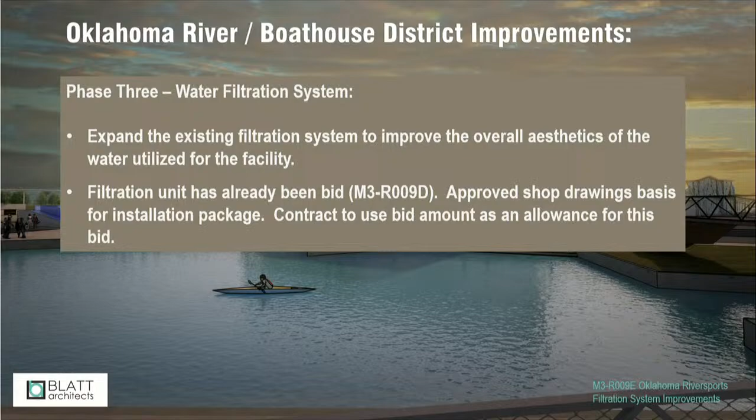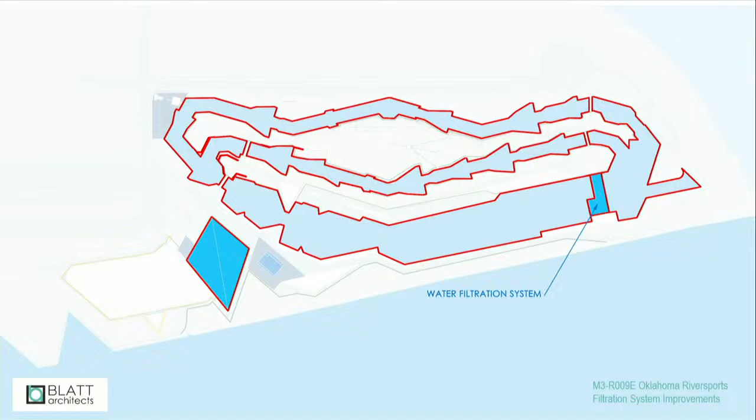So the map in front of you is the site plan of the rapids, and over to the right in dark blue is the location of the current pump house. In that pump house is where this enhanced filtration system is going to be installed. The primary filters are already there, and the WaterTech approved polishing filters are going to be what gets installed. That's the part that has already gone through the procurement process. It's been identified and is sitting to be incorporated into the general contractor's scope of work. After that, it will go through an ozonation process and then out into the rapids channel.

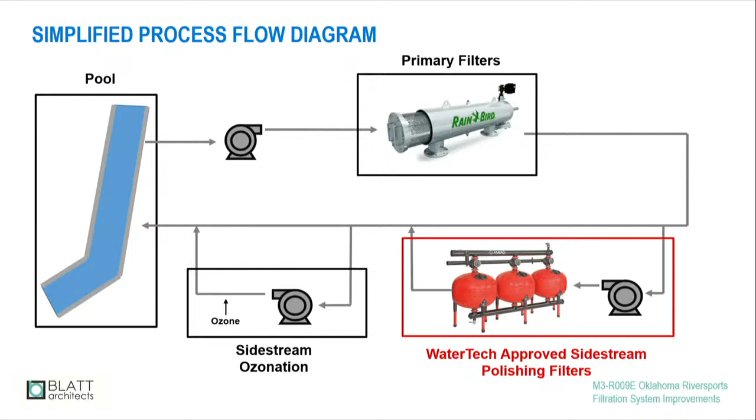So these were the shop drawings that were created. We know that we're going to have 5 horizontal filter tanks, that we're going to remove 95% of the organics in the project, that it's going to go through the approved crystal silica sand filter media. That's all to improve the aesthetics of the water before it enters the channel.

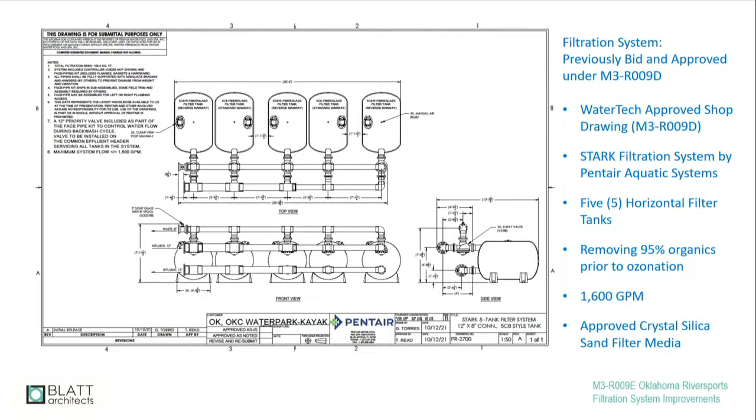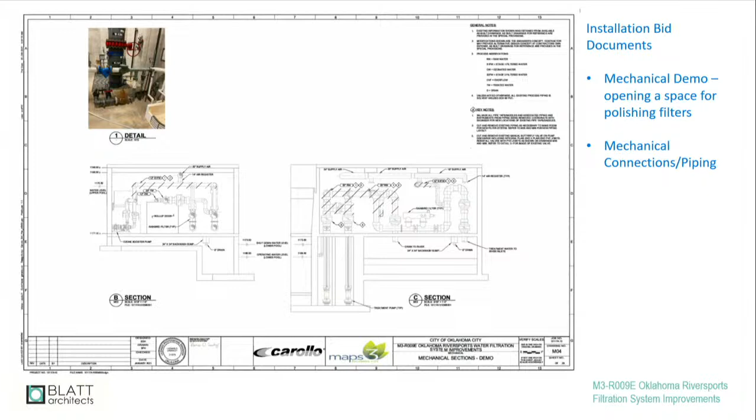So then we took the shop drawings that were created by WaterTech, our engineer reviewed those, and then they incorporated it into these construction documents for the project. This is the mechanical demolition documents showing what will need to be done inside of the existing pump house to incorporate the new filtration system. This is showing what the new equipment is going to be that gets put into the pump house. So the contractor is going to take the equipment that's already been through the procurement process, and he's going to install it inside of the existing building.

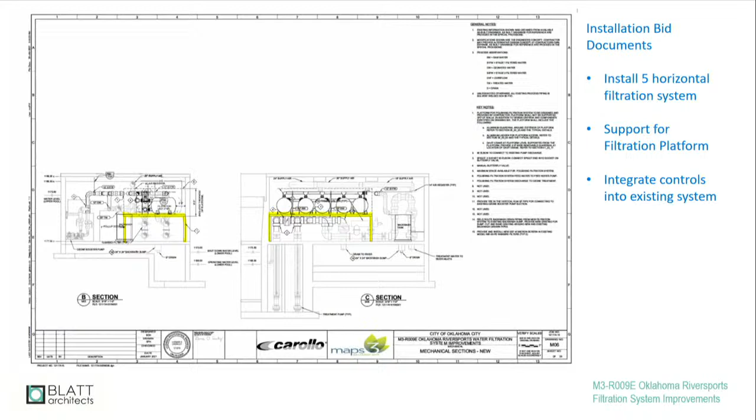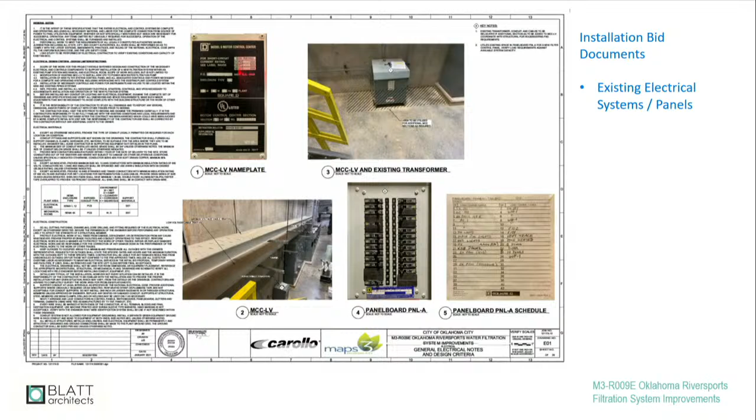There's existing electrical systems that are in the pump house. We're going to have a power draw for the new filtration equipment. We've told the contractor this is the exact specification of the power that's going to be required, and then he will go ahead and have his electrical subcontractor incorporate the work. And then this is how that panel tie-in is going to occur within the building.

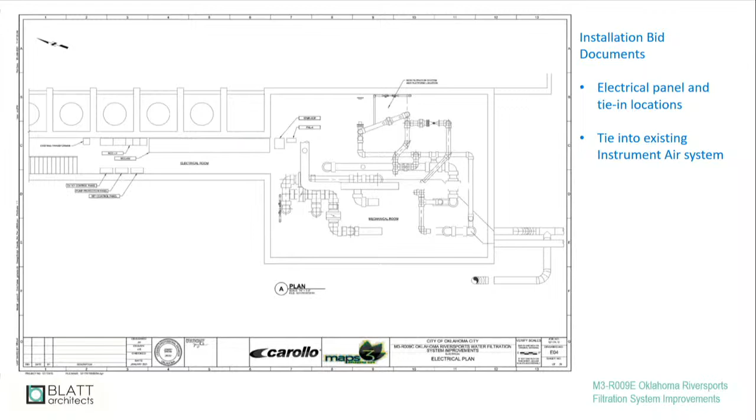So the filtration system that went through the procurement process has a budget of $716,702. That's a fixed number. And then the budget that we're going to be using for installation, which is the scope that we're sending out right now for general construction, is $833,000.

So the intent is in April, we're going to do both the subcommittee and advisory board meetings. We're going to do our city council approval, hopefully, at the beginning of May, out to be submitted for bidding in the beginning of May. Bidding occurs May through June. In June, we would be then awarding the contract. The filtration system that was procured would arrive on site in August, and from July through October, that's whenever the contract for construction would be executed.

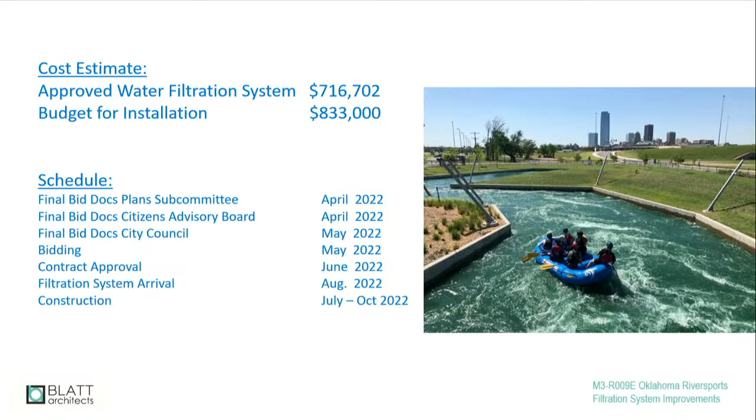You're saying July through October of '22 for construction. Isn't that almost the height of the season? Is that going to interfere? Well, the intent is, this is all happening up in the actual pump house space, and the contractor would be working so it does not interfere with the operation of the space. There would be work that would have to be done so the contractor can do their work.

A lot of this work is going to be prepared off-site and brought in. There will be some impact. We had a conversation with the operator, Mike Knopp, about how that's going to work during his peak season.

So I think the key is also that this equipment can be built and placed in there without actually being in service and in line, and then it's cut into the system at one time. Correct.

Is this a piece of equipment that Riversports is going to be able to maintain themselves, or are they going to have to contract that out? I don't know how they plan to maintenance this equipment. I know that there is a maintenance procedure as a part of operating it.

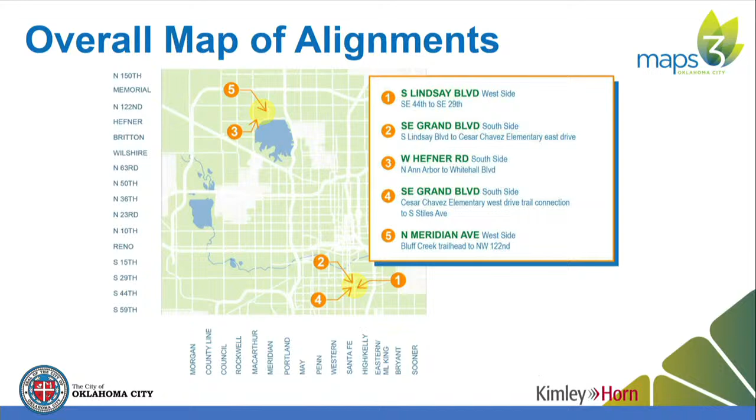So this project, like many of the other sidewalk projects, is to fill in the gaps in sidewalks that exist and to improve the ADA paths in those areas. This specific project will connect some sidewalks and trails. An overview of our limits of the project, it's broken up into some small segments. The first area is in the south part of Oklahoma City, and the second portion is in the northern part, on the northwest side.

So diving into this project, we wanted to align some things as base bid items and some as alternates. Because of the fluctuation in pricing right now in today's market, we felt that was the best path forward for this project and aligning with the construction budget.

So the first of the base bid sidewalk segments is along South Grand Boulevard. In this picture, to the bottom left is Cesar Chavez Elementary School, and to the right is Lindsay Avenue. This base bid alignment would connect Lindsay Avenue and the proposed paths to Cesar Chavez Elementary School. I also want to point out that in the median of South Grand Boulevard, there's the South Grand Boulevard Trail.

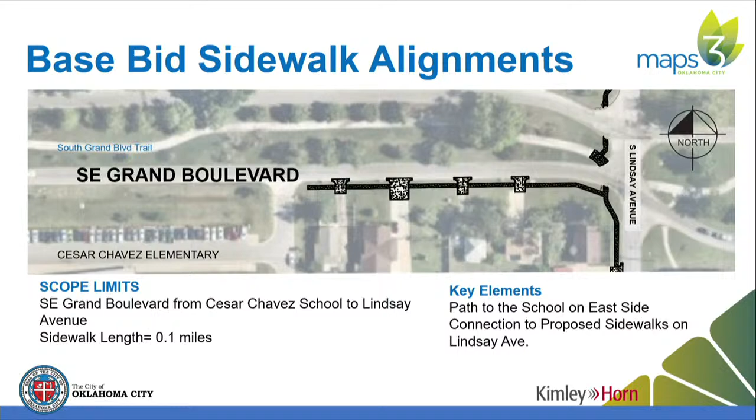These potential sidewalks will be aligning with and tying into that trail as well. This segment is 0.1 miles, and it has connection paths to Cesar Chavez and Lindsay.

Another piece of sidewalk base bid item is Hefner Road. This is just on the south side of Hefner Road by the Whitehall neighborhood. It'll be tying in Whitehall Boulevard to give those citizens capacity to utilize and connect into the sidewalk system on the north side of Hefner Road around Ann Arbor.

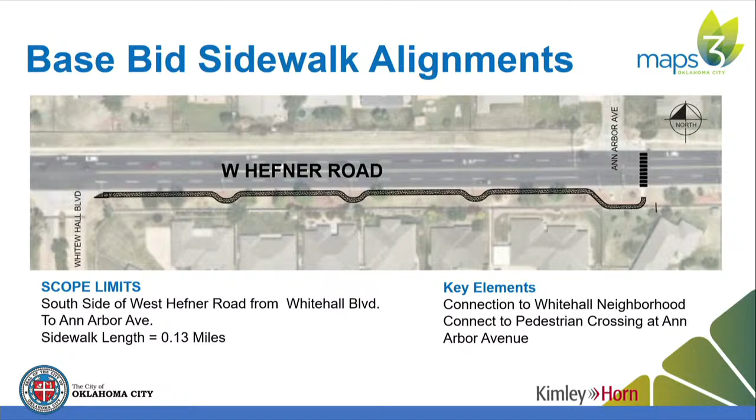A crossing there is at a signal. There are already some existing ramps and light fixtures for signalization of pedestrians. This path connects users to the Bluff Creek Trail on the north side of Hefner. It extends to Bluff Creek Trail on our north, and it'll extend to future trails along the south side of Lake Hefner. This is 0.13 miles.

Then we move into our alternate sections. The first alternate is on the west side of Cesar Chavez School. Cesar Chavez is to my right, and the Grand Boulevard Trail - we're making a connection there at Cesar Chavez to the trail. This extends to the west across a railroad track area. You'll see a white segment that's already existing sidewalk in that area that we'll be connecting to, and then to Stiles Avenue on the west. This is 0.19 miles.

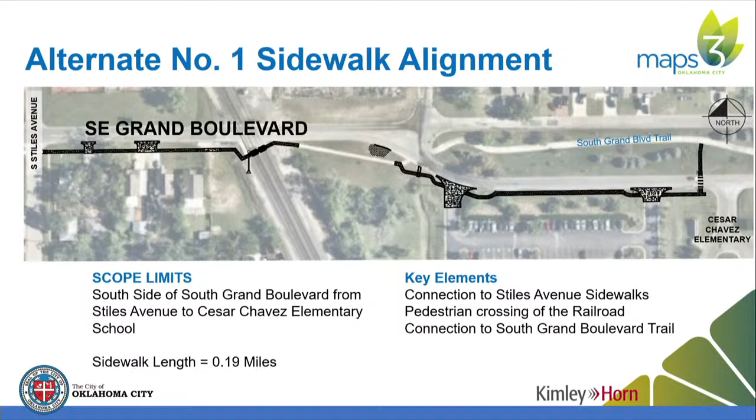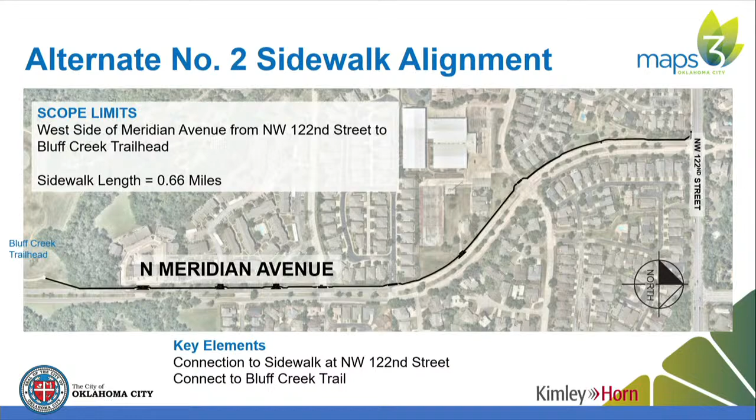And then the last alternate is a segment along Meridian Avenue. It will be placed on the west side of Meridian Avenue. This will connect into 122nd Street and all the way to Bluff Creek Trail on the south end of this. This is 0.66 miles.

So our schedule - we hope to be bidding very soon after this is all approved. And then moving on to construction, we estimate a 6 month construction timeline, completing in early 2023.

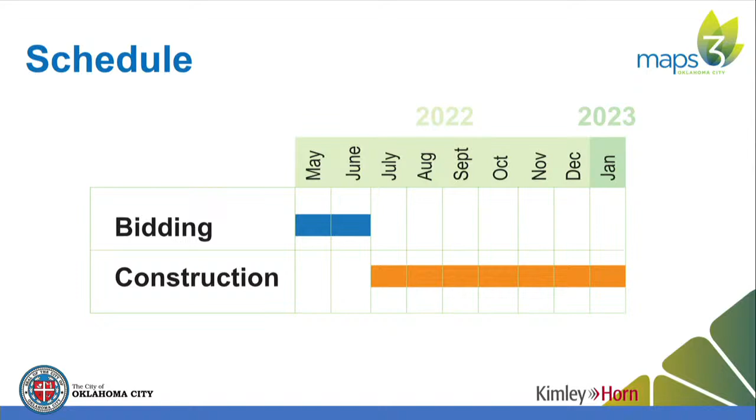Our overall budget for this project was a little over $1 million. As estimated, we have those 3 segments: the base bid would be a price tag of $513,765, and alternate number 1, the west side of Grand Boulevard, would be $122,451, and alternate number 2 would be $271,297. So a total of under $1 million for the entire project. But like I said, we wanted to segment those into base bid and alternates because of the fluctuating costs going on in the market today.

So with that, if you have any questions.

Questions? Mr. Chairman, we did not have a quorum yesterday at our meeting, but we did recommend that we bring this forward to the advisory board this morning.

Thank you, Zane. David, I guess we'd all like to feel like when we started this, one of our goals was to develop a long-term plan for sidewalks, and I guess we could assume this conforms to that plan that was developed at the beginning.

Right, so these alignments really started with what Better Streets, Safer City was doing and the priorities that they had established. We went through their list to determine where we should be going next, what met with our budget, what we could fit in, with substantial discussion within the subcommittee. So we continue to try and execute that plan.